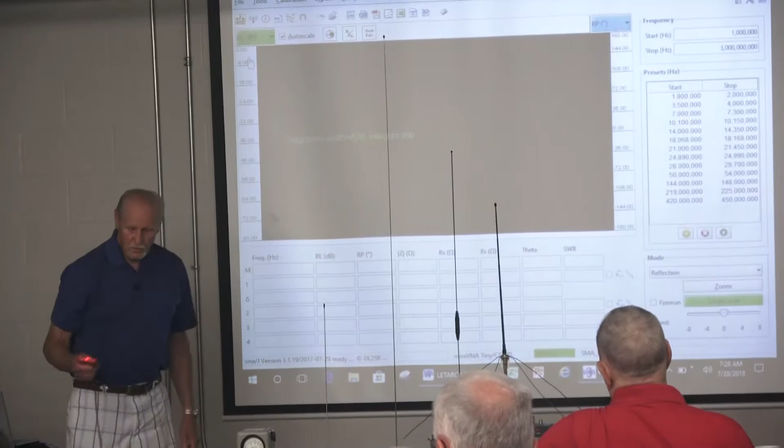So this is what the opening screen of this VNA looks like. The club I think has an MFJ, don't they? Yeah. Now, the MFJ will do a lot of things that the VNA will do, but the VNA will sweep the whole frequency, where the MFJ, you can tune it to a certain frequency, but you can't tell what a lot of the things look like.

I'm going to attach this to the antenna here. Whoop. Adapter. Now what I've done, VNAs are extremely accurate. You can usually tell the accuracy of a meter or any device by the number of decimals it looks at.

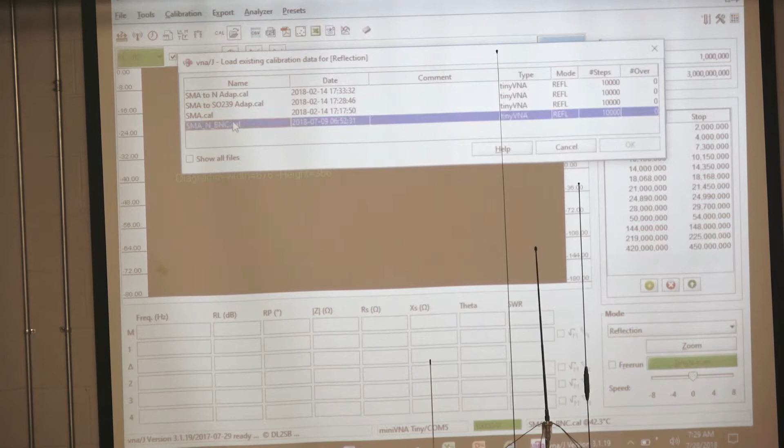Now what I've done with this particular setup, I've calibrated this to where I can come up here to calibration. And I've created files. I've already calibrated for SMA to N, SMA to SO-239, and if I'm just using SMA, or if I'm using a BNC. So I'm going to come down here and select BNC. I'm going to say OK. Actually, it was already down here. You can see down here in the bottom, this is the calibration being used.

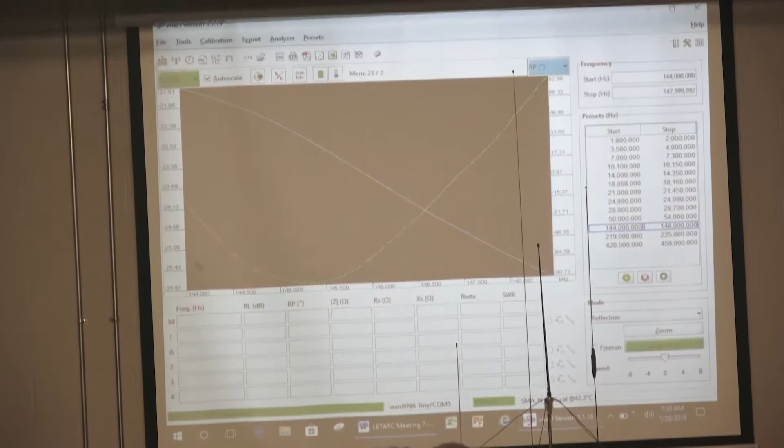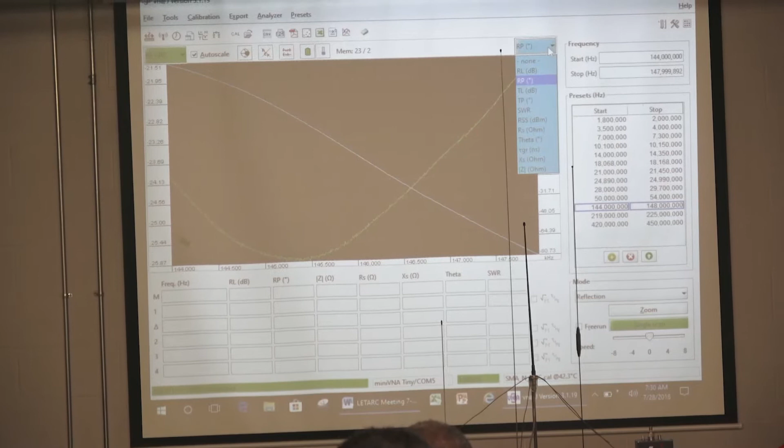I've also selected a frequency span. I've got all the frequencies here that are used in the amateur band. Right now I'm using 144 to 148, the 2 meter band, a 2 meter antenna, and I'm going to click on that and insert that frequency up there. And what it did, it swept this antenna. Right now I'm able to look at two different things, return loss and phase, and I'm going to say SWR. Now, which antenna? This antenna right here. This is the antenna I'm attached to right here.

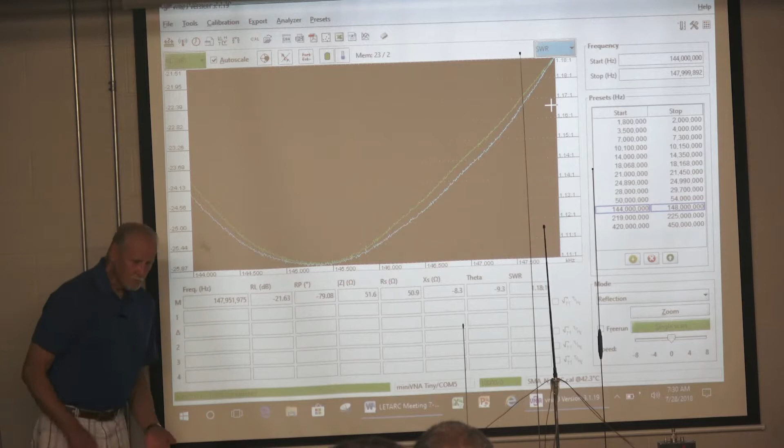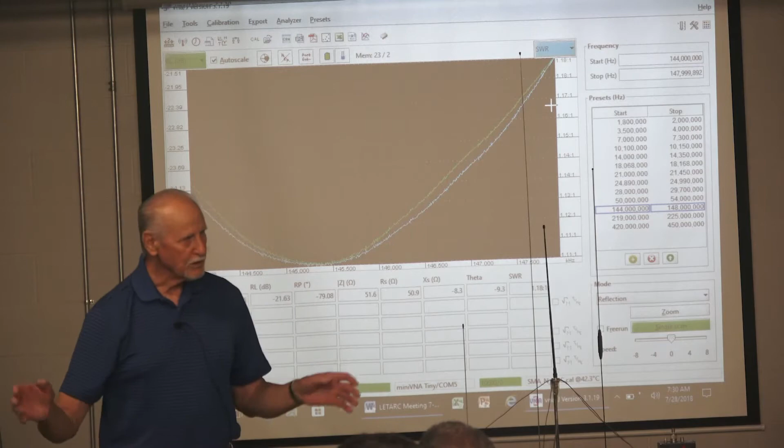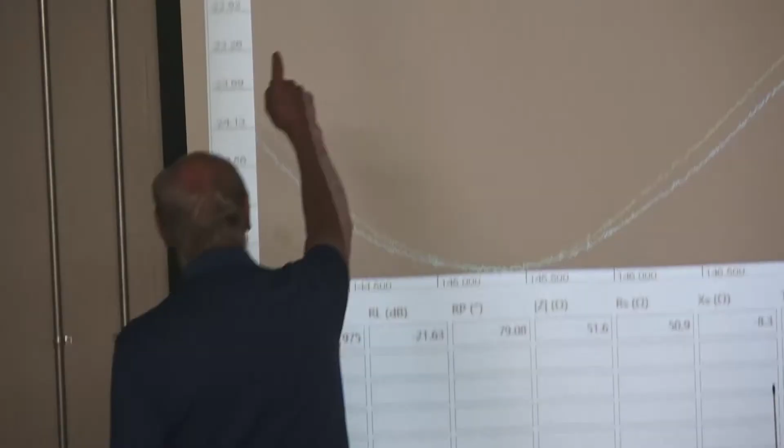Now, in the engineering field, I had a lab that had thousands of dollars worth of equipment in it, but I did not have an SWR meter. I had return loss. Right now I'm looking at, you can see the return loss and the SWR. The green one is return loss, and the SWR is what you use in amateur radio.

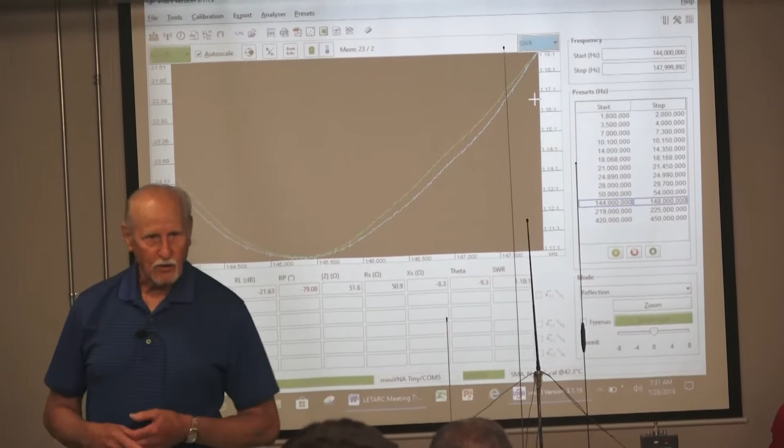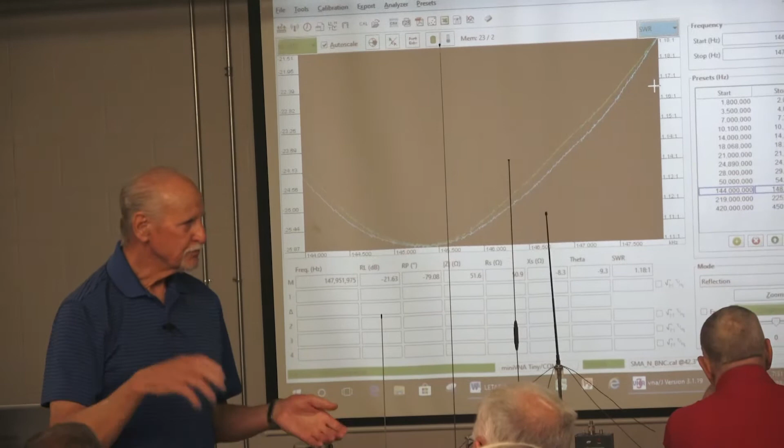What's SWR? Standing wave ratio. Voltage standing wave ratio, right? In other words, your SWR meter has a diode in it, and it picks up a voltage, and it compares that forward voltage to a reflected voltage. Return loss is about the same thing, except you're measuring power. It looks at the forward power and the reflected power. So they're kind of both the same.

All right, we're back to where we were. Notice that I'm strictly looking at SWR. Since we use SWR, I'm going to make this return loss an SWR too, or I can tell it none either way. You can see down here, anytime I move my cursor across here, that right here is the SWR reading. And as I move it across, this antenna is 1.15 to 1 or 1.2 right there, and it doesn't change very much. It's excellent.

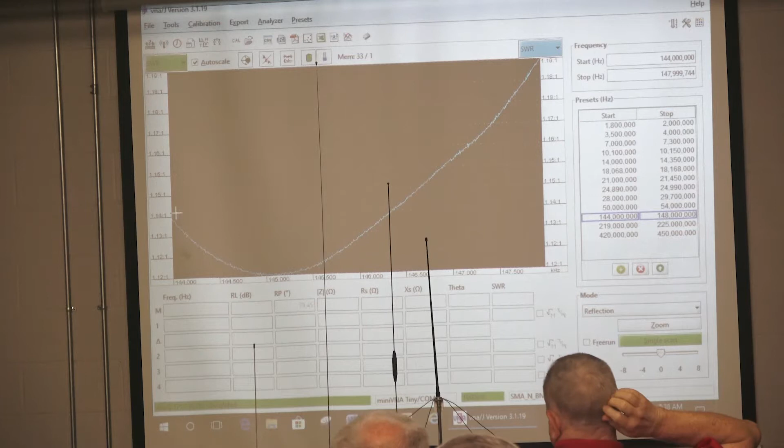Now I can put markers on here. I can come over here and put a marker here. And so now it'll show up below. Marker 1 is at 145.0. You can see how accurate the frequency is on a VNA. And over to the right, you can see at that frequency, the SWR is what? 1.12.

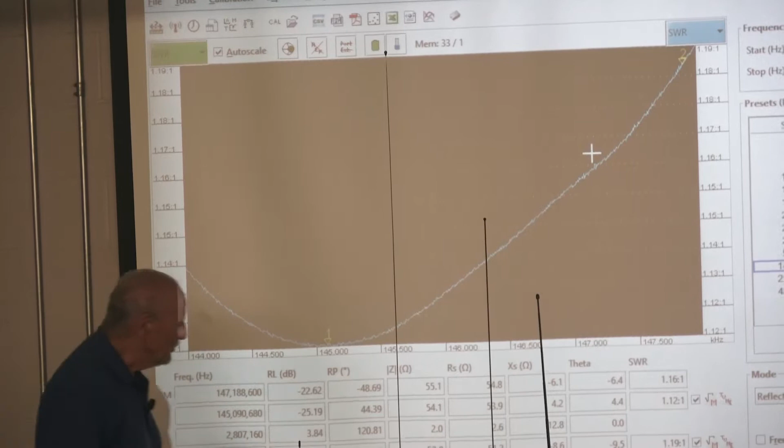So I'm able to look at the complete response, or the worst case over here at the high end of the band. I'm going to put a marker there. At that end, the worst case is only 1.19. So this antenna is extremely good.

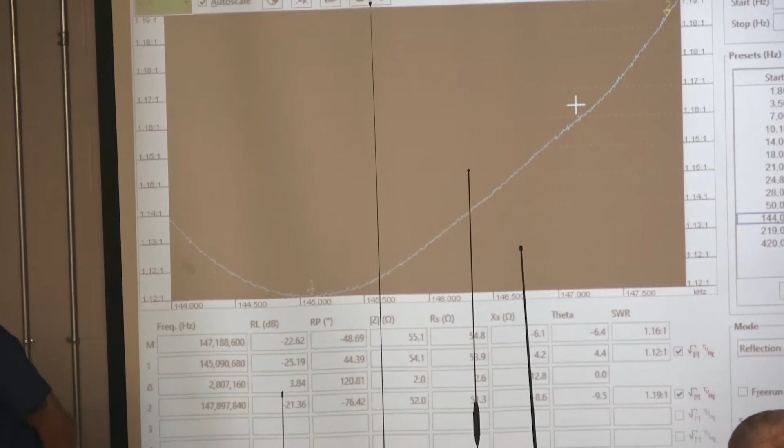When you're looking at antennas, one of the things they might talk about is the resonant frequency of the antenna. What's the resonant frequency of an antenna? How do you determine that? By looking at your graph up there. What really makes things confusing in electronics is resonant frequency occurs when there's no reactance involved. In other words, there's no capacitive reactance, there's no inductive reactance. And reactance is signified by X.

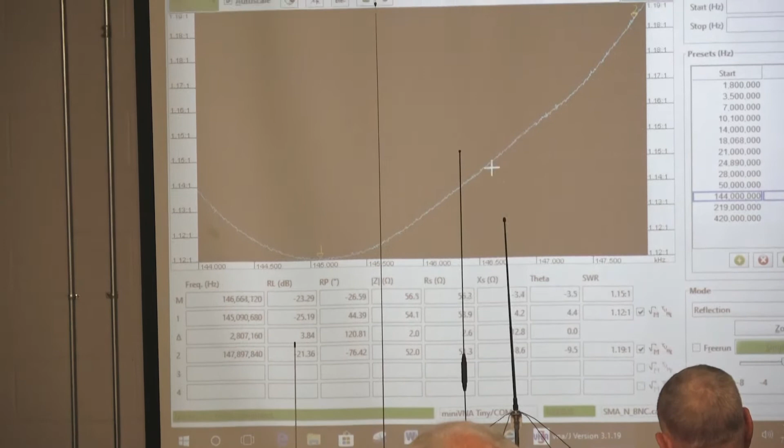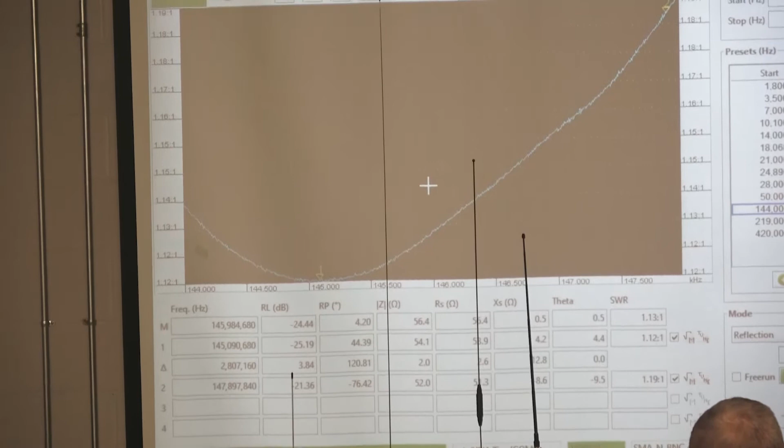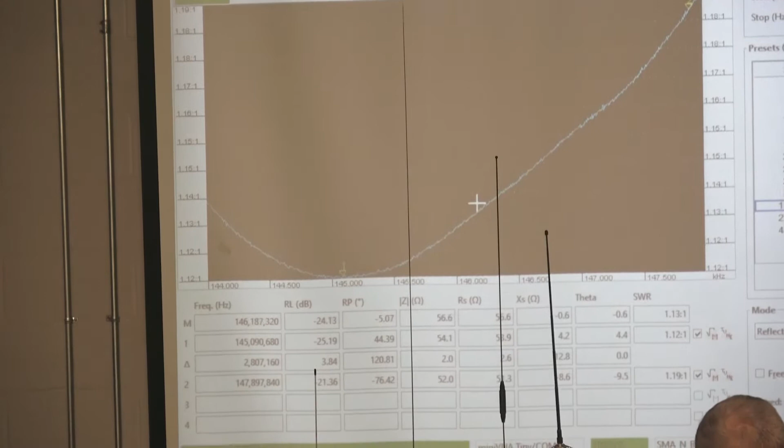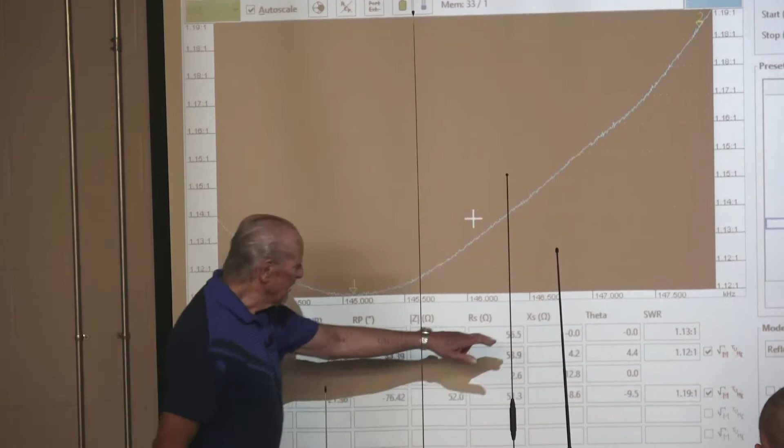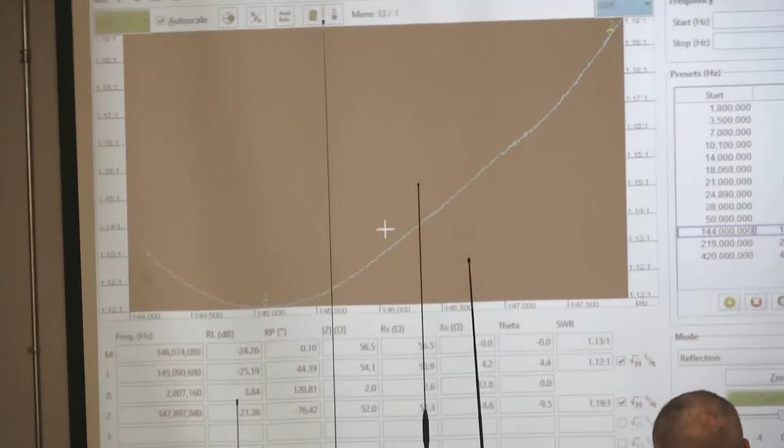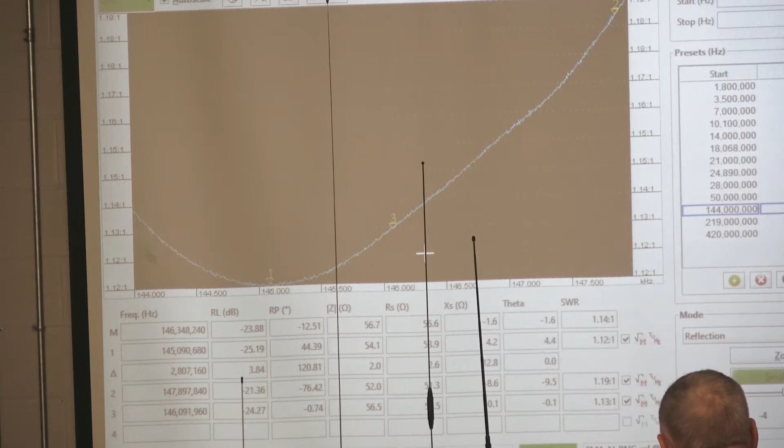Now, VNAs also provide a Smith chart. Let me put another marker here. Now I got 3 markers up there. I'm going to go over and look at the Smith chart. If you were to test this at your home, would you hook it directly to the antenna, or would you connect it after it runs through your cable run into your house? You want to connect it where it's going to connect to your radio, because I'm interested in what the radio sees.

Now, with the SWR on a radio, usually it's just a diode to observe what the voltage is doing. Does that mean that if it's not within the SWR window, it would power down the transmitter? If you didn't have an antenna tuner, most radios will protect themselves by reducing output power. So you think you're doing good, but because of high SWR, your radio is powering down? I can make the radio put out its maximum power by making the radio think it sees 50 ohms.

What you just showed us means the resonant frequency isn't necessarily where the lowest SWR is, right? Not necessarily, no. This antenna showed the resonant frequency and the lowest SWR did not occur at the same place. So is it typical that resonance does not occur simultaneously with the lowest SWR? As a general rule, it can occur at the lowest SWR, but not always. They're usually fairly close. I have a little program on the computer that'll explain what a Smith chart is.

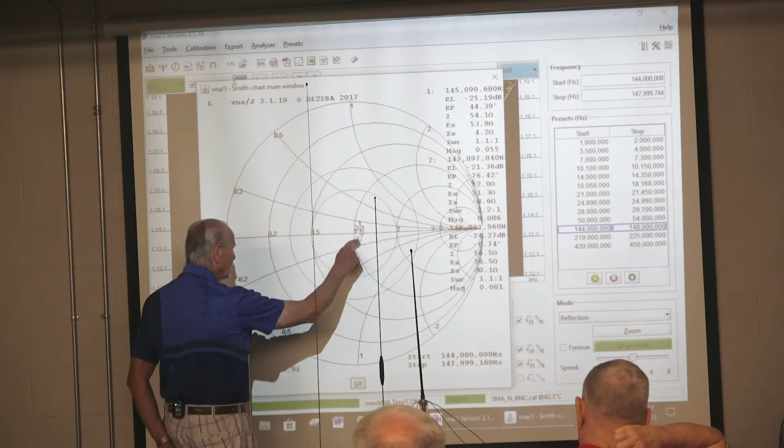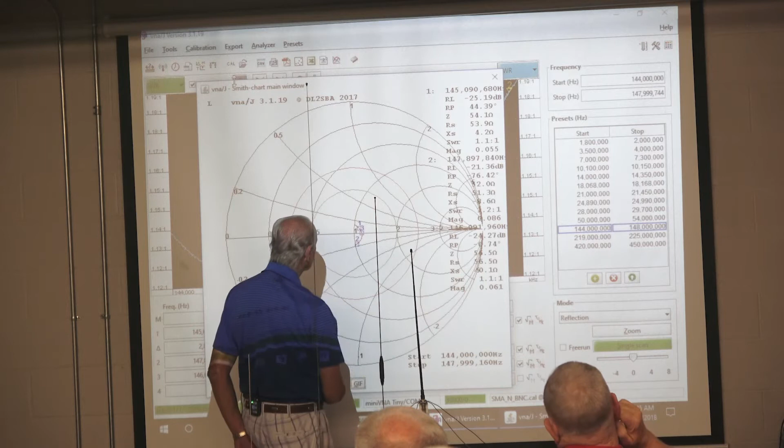I've put 2 markers here. Everything above this horizontal line is inductive reactance. Everything below the horizontal line is capacitive reactance. I've got marker number 3, which was at the resonant frequency. Did I mark 3 at the resonant frequency? Yes.

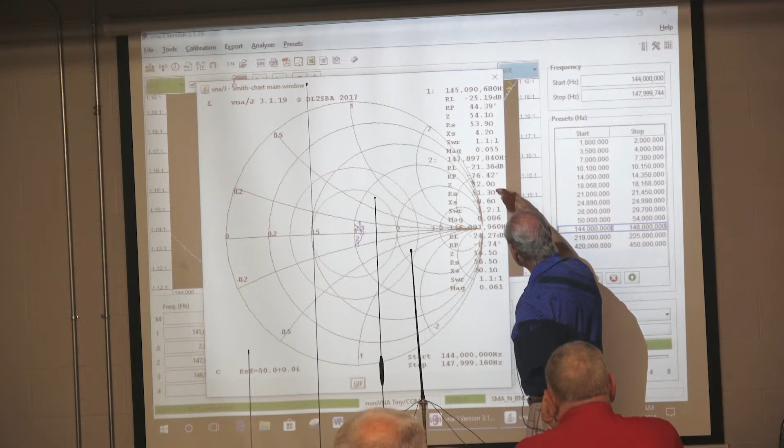You can look at this, and notice that the reactance here is 0. Up here, the reactance is 4 ohms. Down here, the reactance is 8.6. It looks like, I can't really tell what's in the way. I can look at the computer and get a better picture. But 3 is marked the resonant frequency.

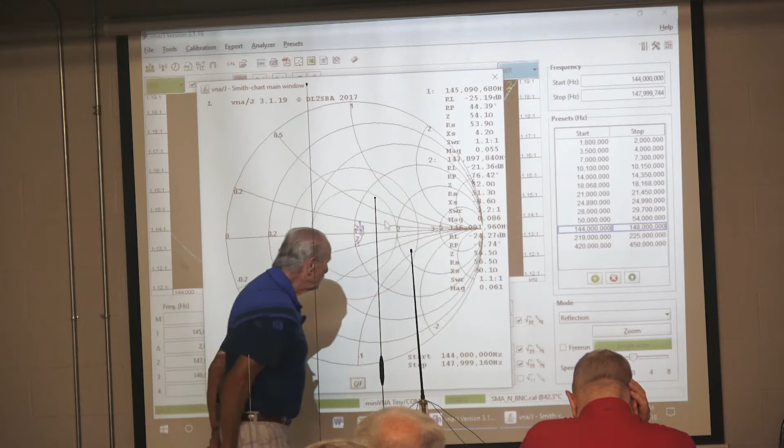There's another thing that occurs when you're at the resonant frequency. That means their ohms is going to be the same. Let me go back to the chart, it'll be easier for you to see. The 3 marker is at the resonant frequency, and we can see there that it did not occur at the lowest SWR level. If I go down there and look at 3, the impedance Z and the R are both the same. Notice the resistance is the same in both places.

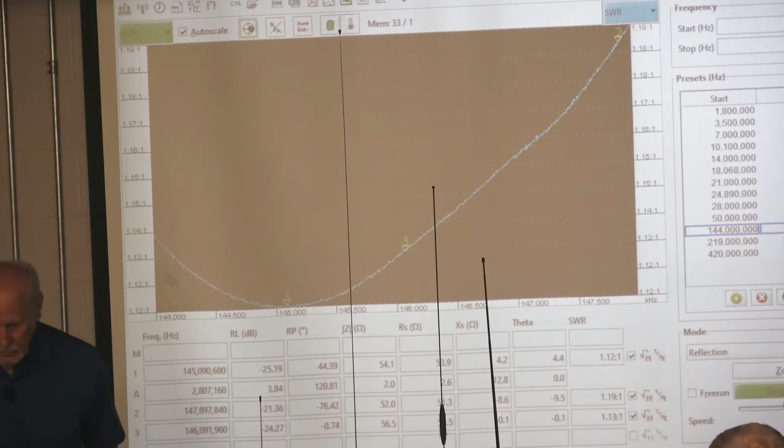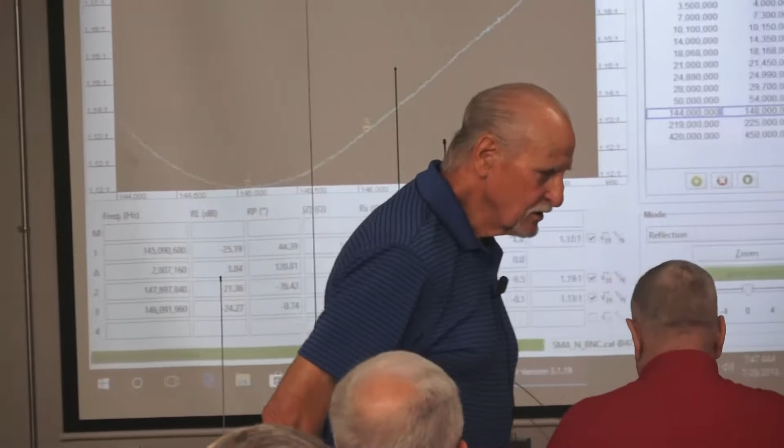If you're going to use this meter here to find the resonant frequency of your antenna, you have to go to X and adjust it until that X reads 0. So this meter right here will tell you what the resonant frequency of your antenna is. You just have to keep adjusting it until you find the 0. This has 2 meters. This is the imaginary resistance meter. This one up here is the true resistance. So this resistance and this resistance are going to read different.

Does everybody know that? Could you expand on that a little bit more about what the difference is or why it reads different? I'm not really following the concept of imaginary resistance. They use resistance as a measure of capacitive reactance. Right, but it's not really a true resistance, it's an imaginary resistance. Well, true resistance is an element that actually dissipates power, okay? Capacitive and inductive reactance are not a measure of power. They're a measure of the energy that's stored either across the plates of a capacitor or in the coils of an inductor.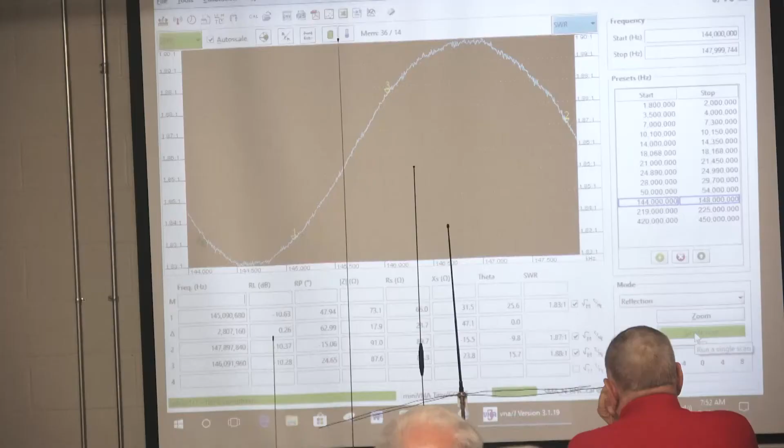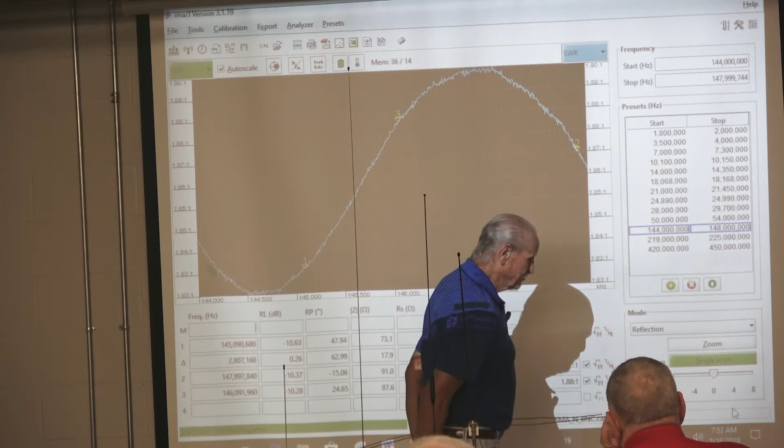I moved the radios on this one here. I'm going to do another sweep. So is the answer, like many things, it depends? Because you're talking accuracy, it depends on your source of accuracy. Doesn't look anything like it did before, does it? You can see up here now, the SWR has moved from low 1.1s to 1.9.

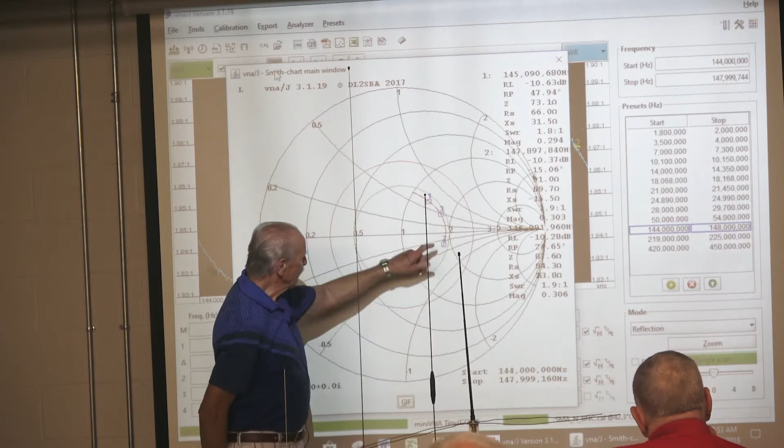Look at what happened on the Smith chart. The antenna has all of a sudden become very, very inductive. And what happened to the resonant frequency? This is the resonant frequency point down there now.

Can you overlay those two charts? Do what? Can you overlay those two charts? Not the Smith charts, but the graphs. You mean the original and this one? Oh, no, I can't do that. I could if I was doing it on the computer.

I brought 3 different antennas here. Quarter wave, 5/8, and a dual band antenna. We get kind of fixed on resonant frequency. One of those antennas does not resonate at the amateur band. Which one would that be? No. The 5/8. The 5/8 is a non-resonant antenna.

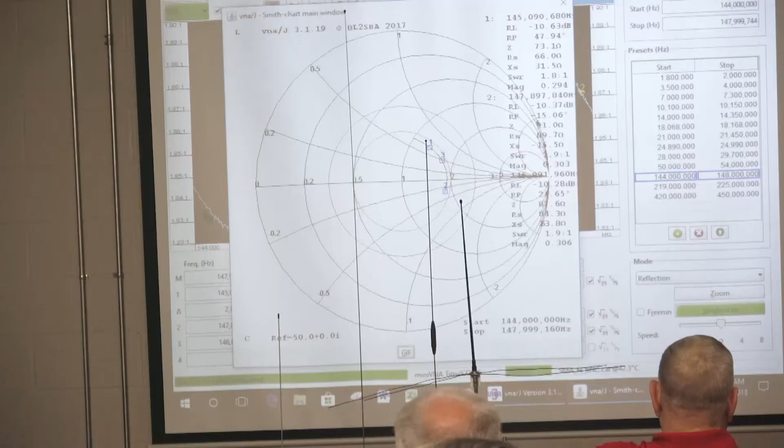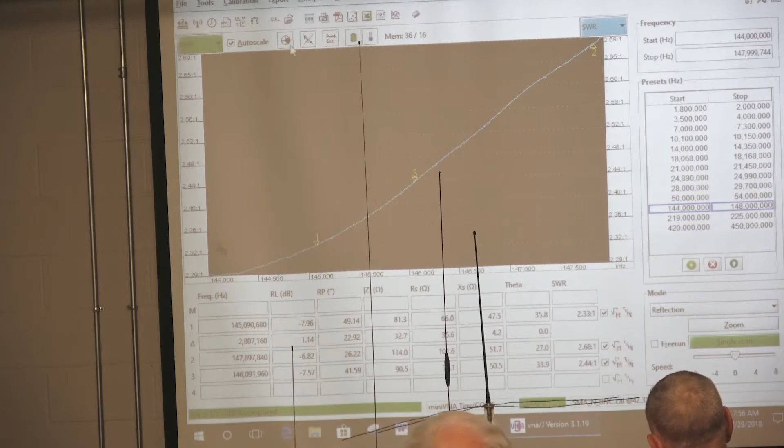If I hook that antenna up to this VNA, do another sweep. If I run my cursor across here and I watch X, I can see that no place does X ever equal 0. Look at my Smith chart. This is the resonant frequency line here. This never crosses that line anyplace.

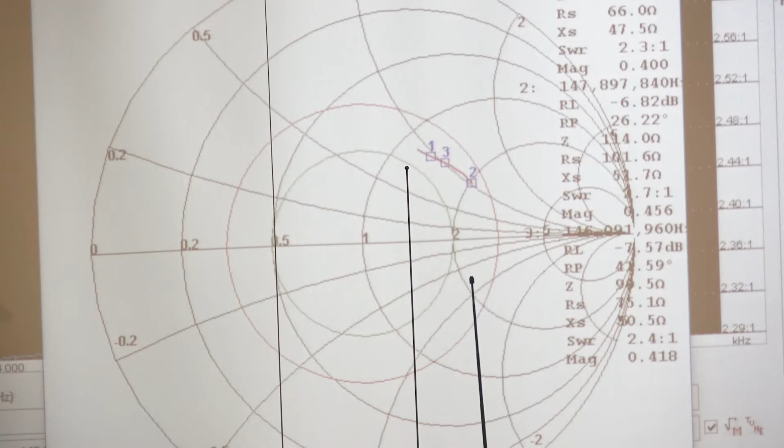But 5/8 antennas are used on a lot of vehicles, a lot of commercial vehicles. If you look at a police car, it'll usually have a Larsen 5/8. What about the SWR? Worst case SWR is what?

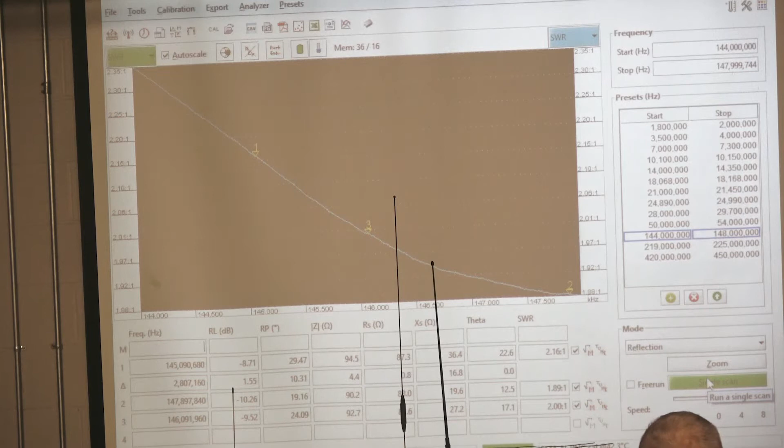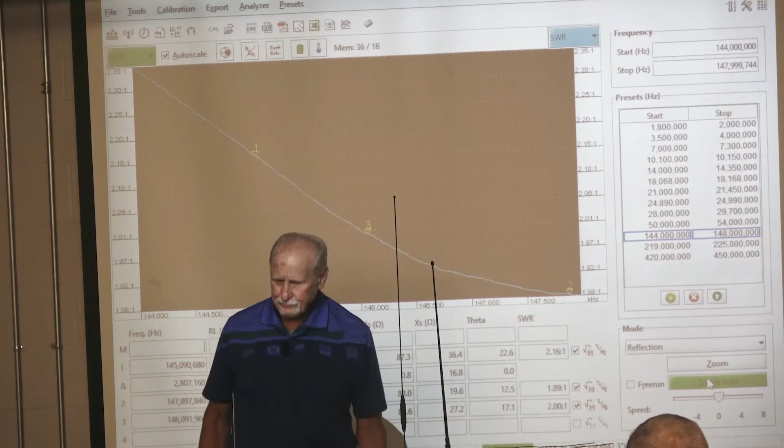Let me move it away from the other antennas and see what it looks like. It's not resonant, why do they use that then? Is it just propagation? It's fairly low. Okay. Oh, it swapped ends, didn't it? But even at the best end, I'm still what? 1.8. So was that an effect of the other antennas that you have here? Probably not. It doesn't have a ground plane.

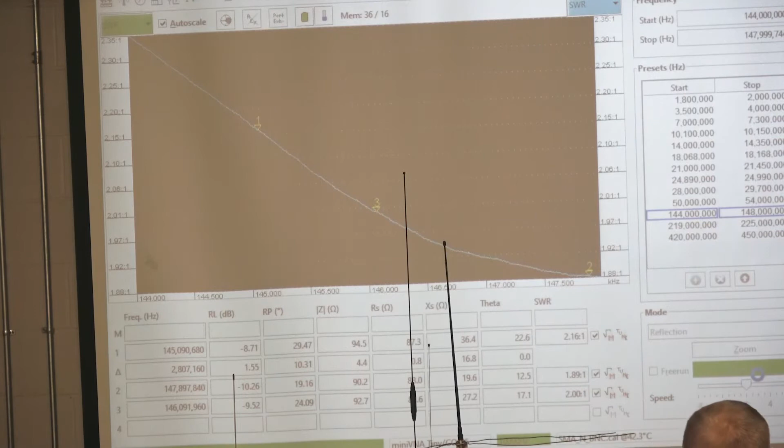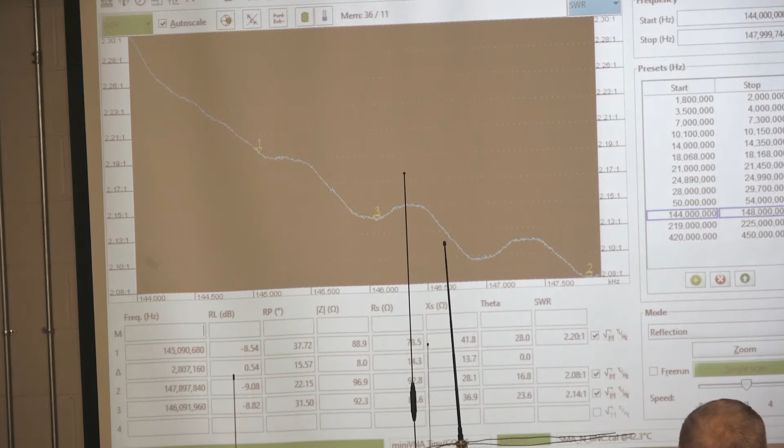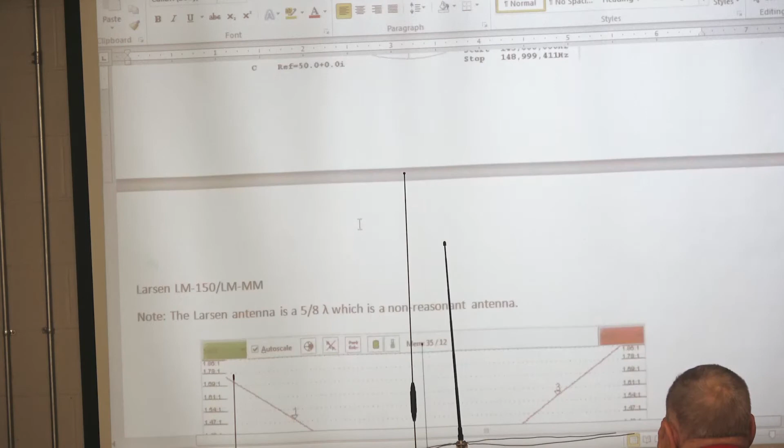Let me see what moving it to there did. All right, this is the performance of this same antenna on top of my car. Your car obviously has quite a bit of metal in it. Not like most of them nowadays. Yes, it does. It actually has a ground plane. What's gonna happen when it's covered? You won't see that dip.

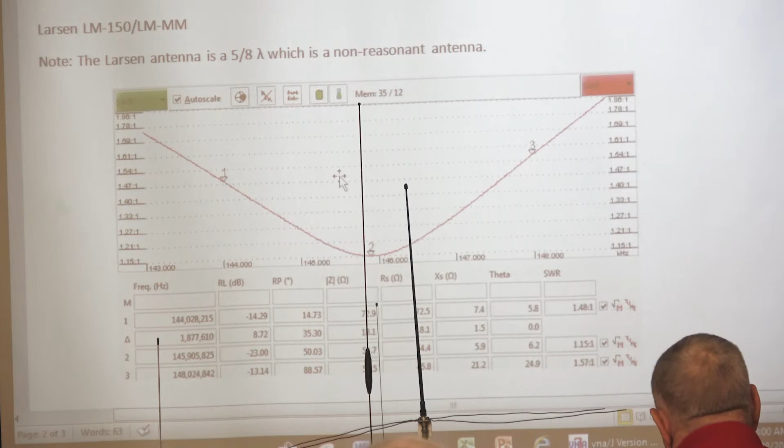You can see that the SWR is a lot better. It's still not as good as a quarter wave antenna with a good ground plane. Believe it or not, that 5/8 never is attached to the ground any place. In other words, your shield on your coax, this is a coil, and you can notice the coil is all plastic, and there's nothing connected but the center.

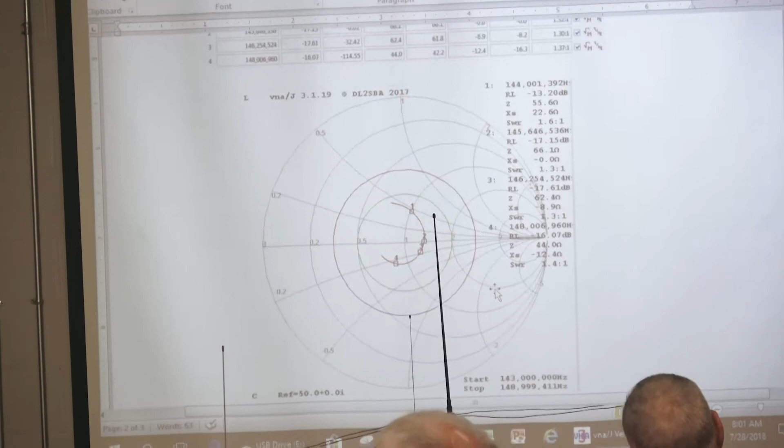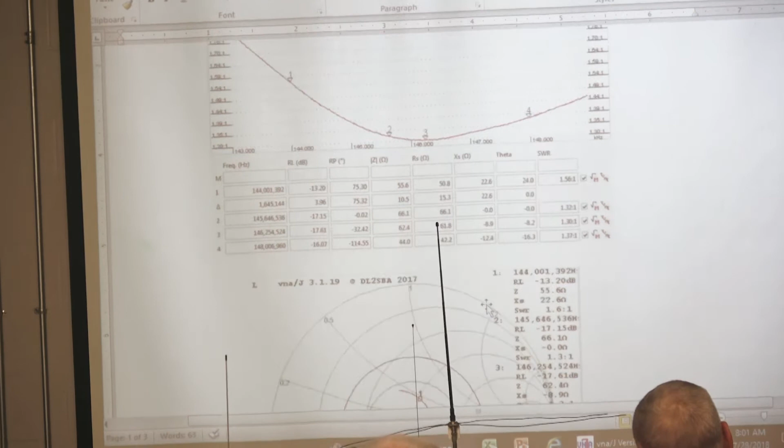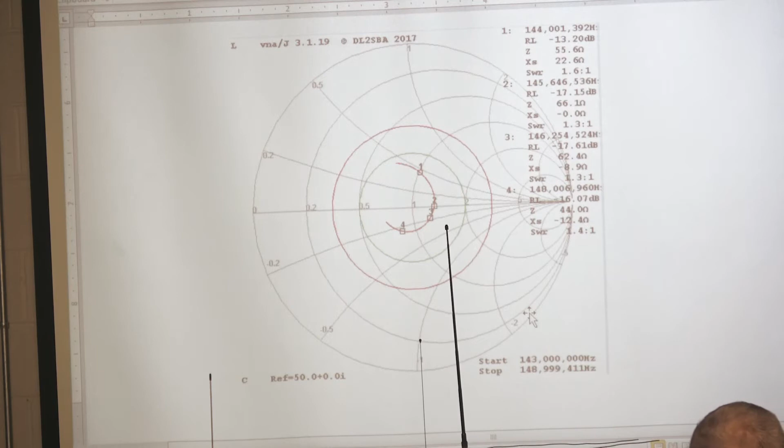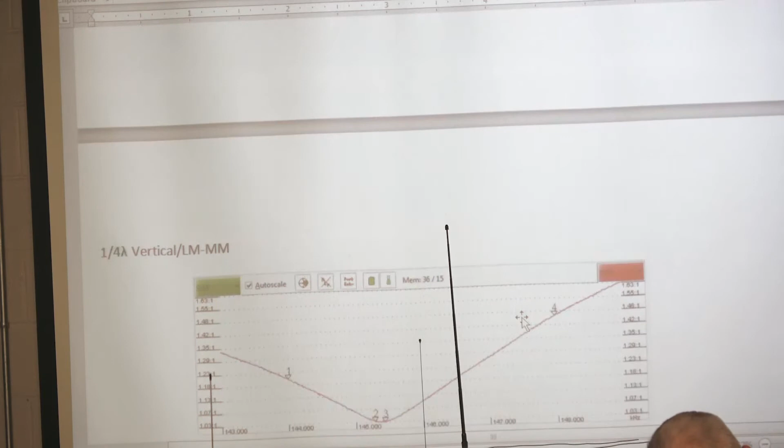And the quarter wave antenna, this is a quarter wave antenna on top of my car roof. And you see it also has what? A resonant frequency. It crosses that horizontal line. Of course, my rooftop does not bend like this. So the SWR is actually pretty good though, isn't it? 1.4 at the worst case. Both ends 1.2, that's not bad.

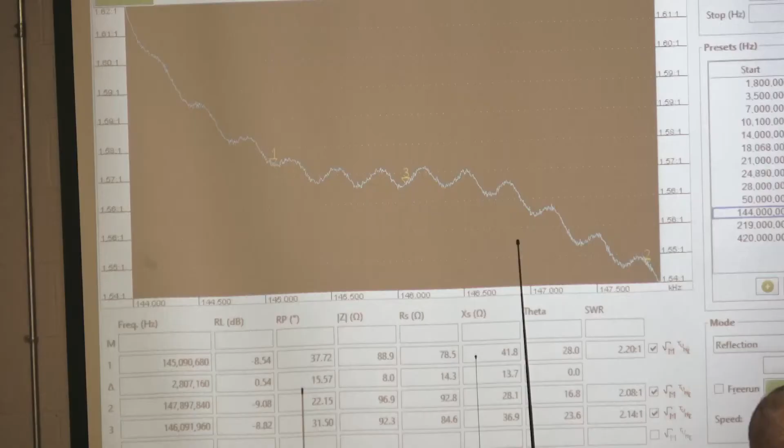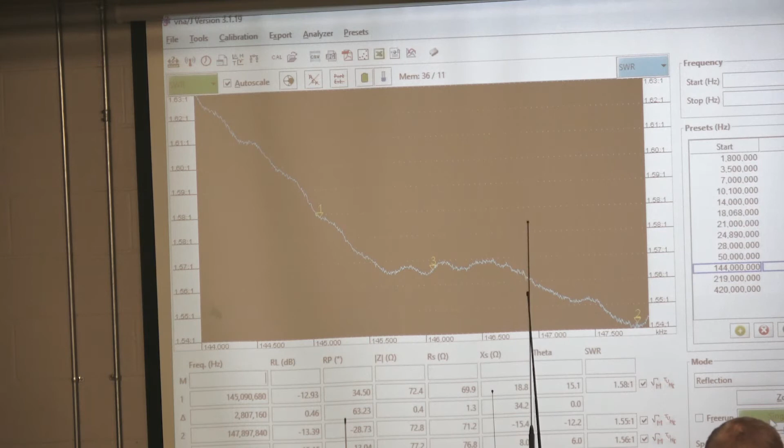Roof of my car. What you're seeing is the ground plane is wiggling a little bit, so you're seeing all those ripples. Why is it rippling? It's moving. Because the ground plane is part of the antenna. You can see the longer it sits there, the cleaner this will be.

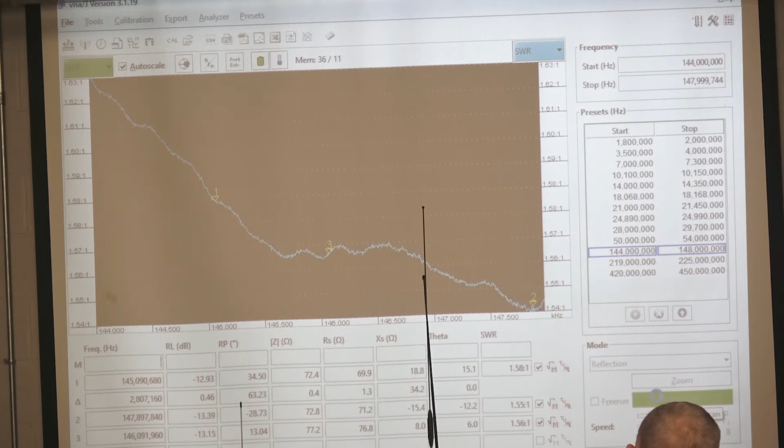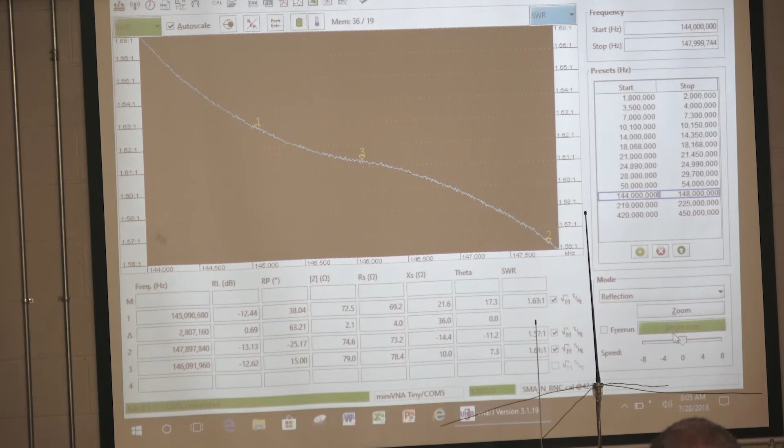When you're adjusting your antenna on your car, where do you need to do that? Not next to your garage or someplace. You're real close to the dual band antenna. Yeah, leave that one down right now.

It's a wonder we ever get out of the car with our transmissions.

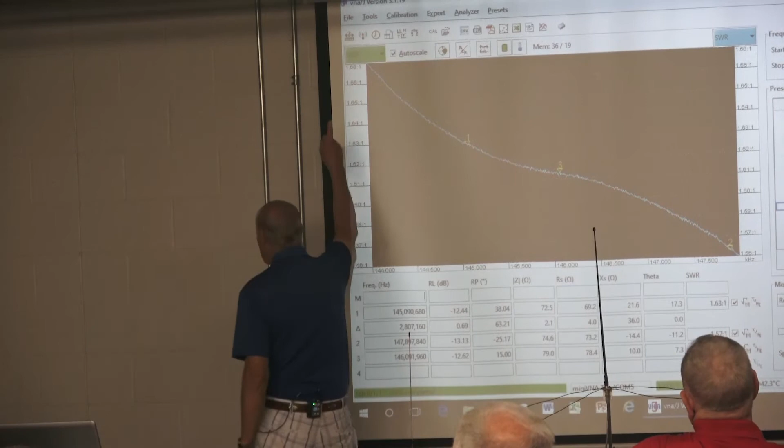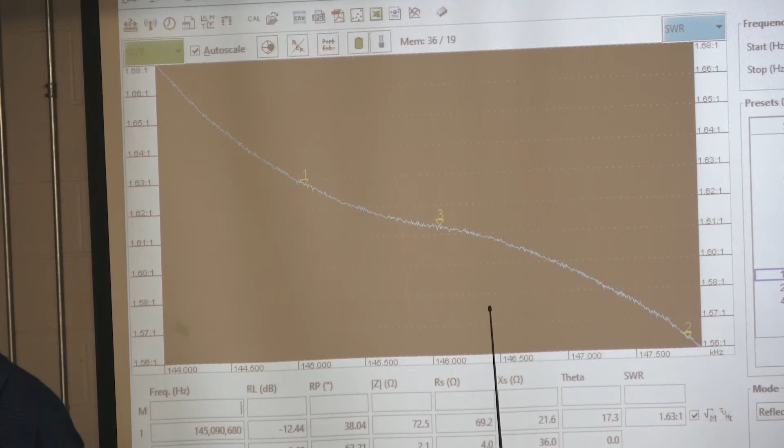I can see the worst case now with that flat like it is, what? What's the worst case? I'm gonna add my SWR meter here to this scenario.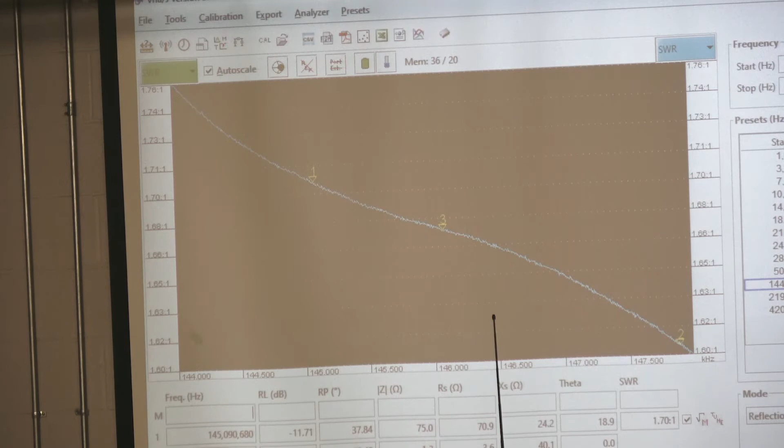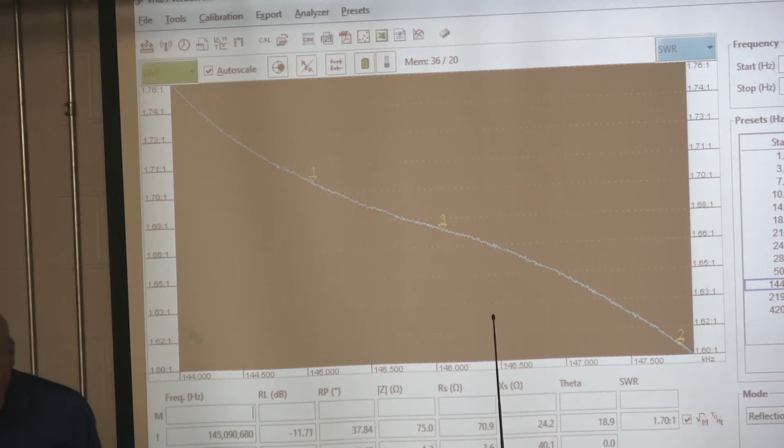So that's the frequency range of TV and amateur radio. Sure, right. So what I'm trying to do is see what it is approximately. Oh, okay. Changed the one end quite a bit. Actually, it made it better. What I wanted to illustrate there is when you put a meter in line with your antenna and you take it out, you've changed the length of the antenna line, and you can see that the antenna length is changing its resonant frequency. Actually, let's look at the Smith chart, see what it does to it.

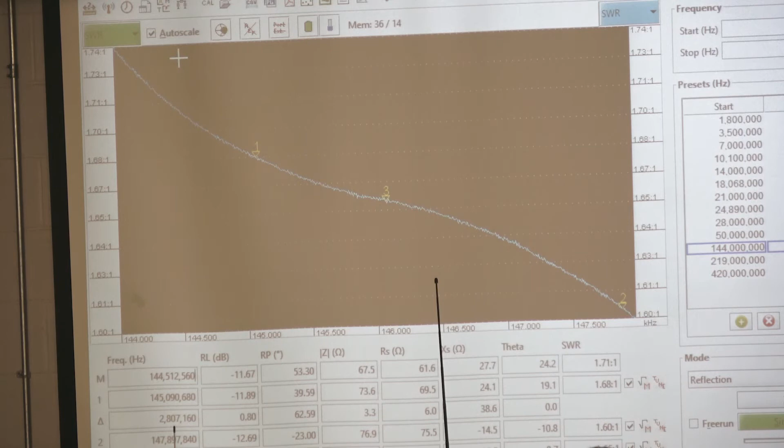Jerry, if you just substituted 20 feet of coax in there, would it? Oh, it'd do the same thing. Anytime you change, that's why I say when you go to adjust your antenna, you need to use something that's measuring it at the, when I take it off the instrument and I'm measuring the width and I put it on the radio, I want the radio to see the same thing I measured. That's why you gotta measure right in front of the radio, not at the actual antenna. Pardon? That's why it's important to measure directly at the radio, not at the antenna. Because everything else is gonna affect the reading.

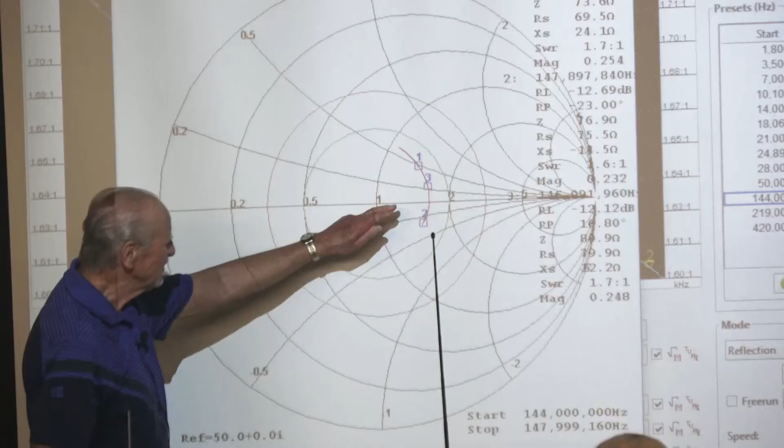I'm not sure, but antenna height is also going to affect it, up on the tower or close to the ground. I want to measure it right at the antenna. Okay, but I'm going to measure it right at what hooks to my radio. Okay, but if I'm trying to tune the antenna, shorten or lengthen the elements, is it doing good to measure it close to the ground, or has it got to be up on the tower? Or is it going to change significantly with antenna height? It's going to change with antenna height too. Up and down, up and down. This is the case where there's one on the truck, there's the tower, leans over, so you can work on everything. By changing my ground plane, I've also changed the resonant frequency. If I add cable to it, if I change the meter, I'm going to add the meter to it.

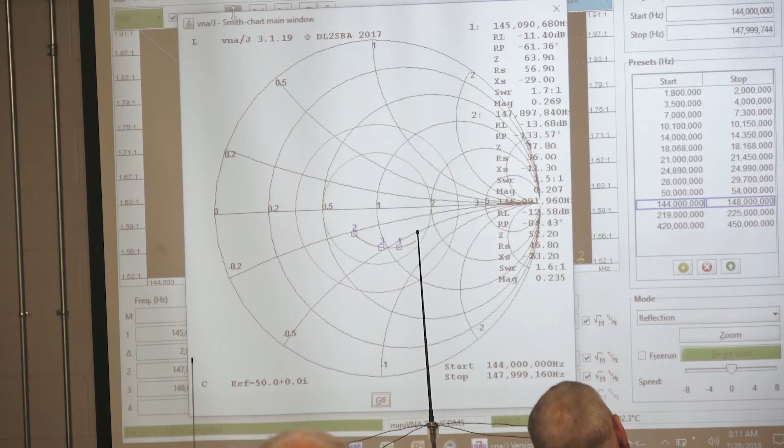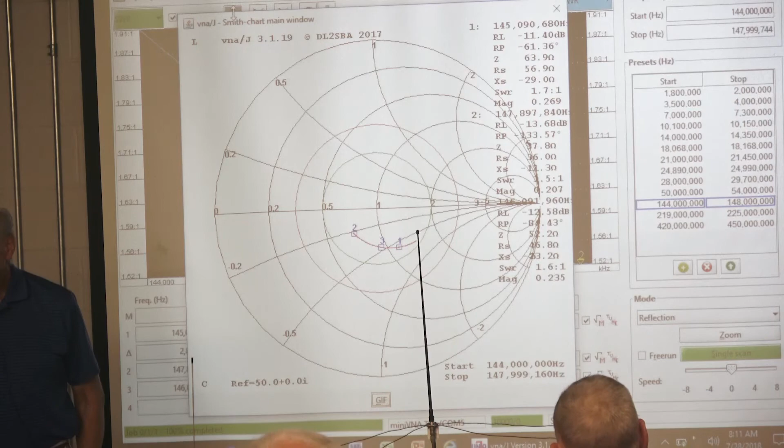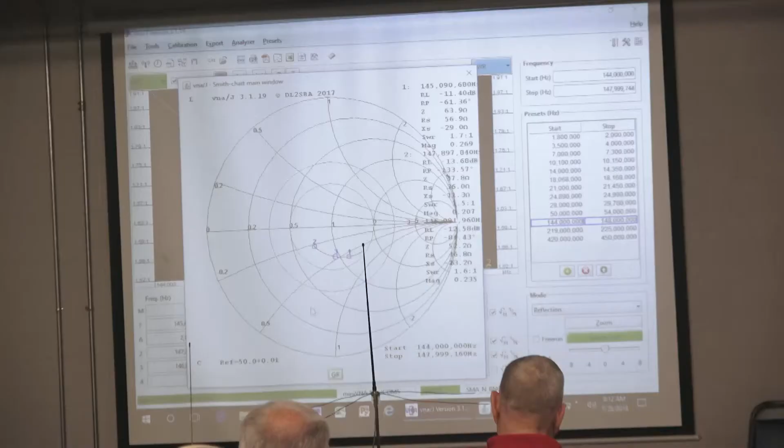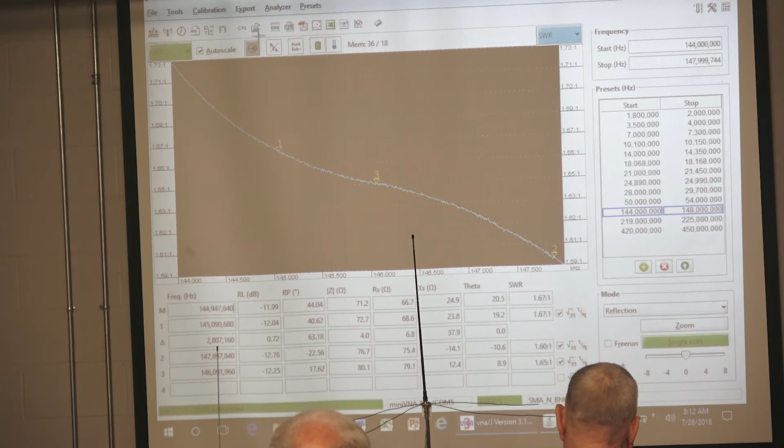Look at what happened to that antenna. Huh? It's all capacitance now. Everything's below. There's nothing anywhere near the resonant frequency. Just by adding what? From the amount of movement, about a quarter wavelength. Huh? The SWR really didn't show me a whole lot of difference, did it? Go back to the Smith chart again. That's without the meter.

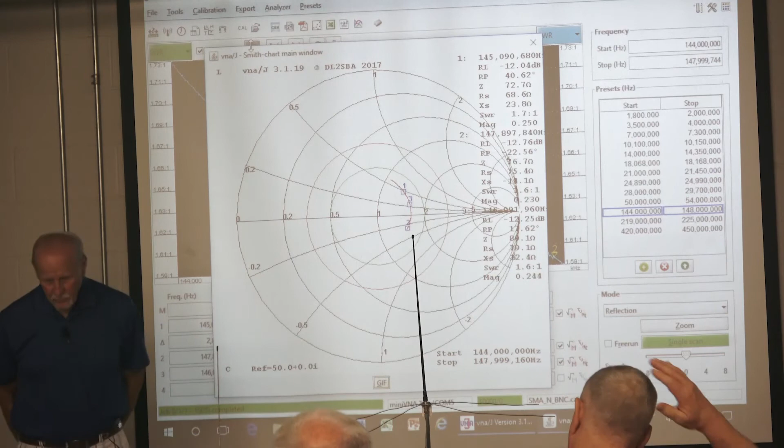So what that's telling you is if you use an SWR meter and you put it in line with your antenna line, it's not going to be the same when you take that meter out and hook it up to your radio. It will not. Will the reading on the SWR be accurate? It won't be what the radio sees, because you have the radio back here and your meter and your antenna, but between here and the antenna will be accurate. But I'm interested in what the radio sees. Right, but I just want to understand that part. Right.

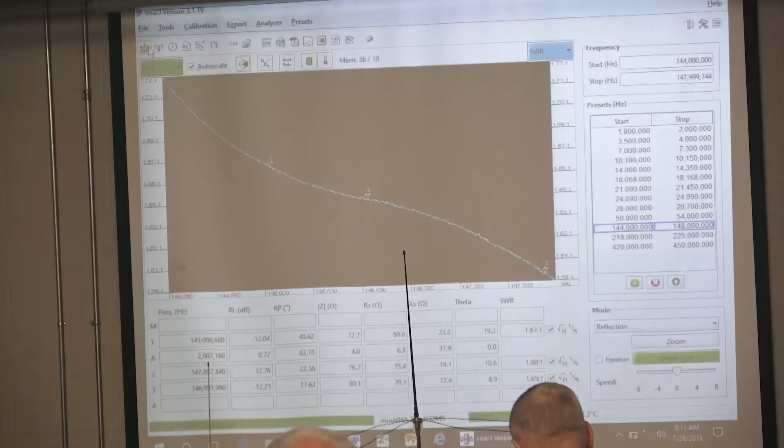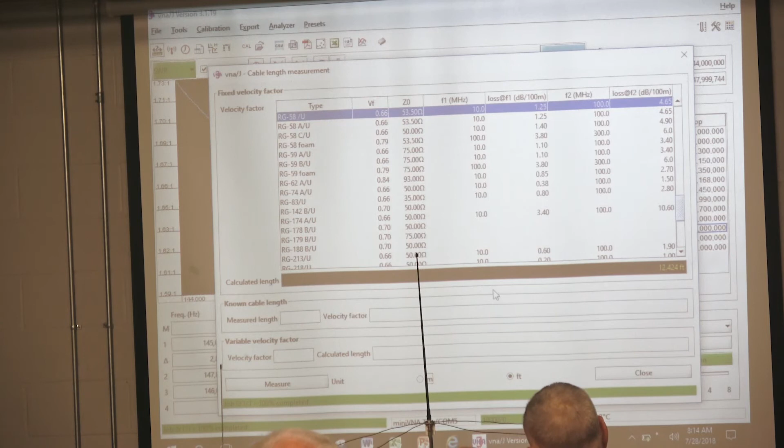If I'm in my shack and I hook it to my antenna, and I say, I want to know how long my feed line is. I'm gonna go over here and change that to feet. I'm going to say measure. All right. That tells me that the length of this cable right here is 12.4 feet. Pretty neat, huh? We went out and measured the length of that cable.

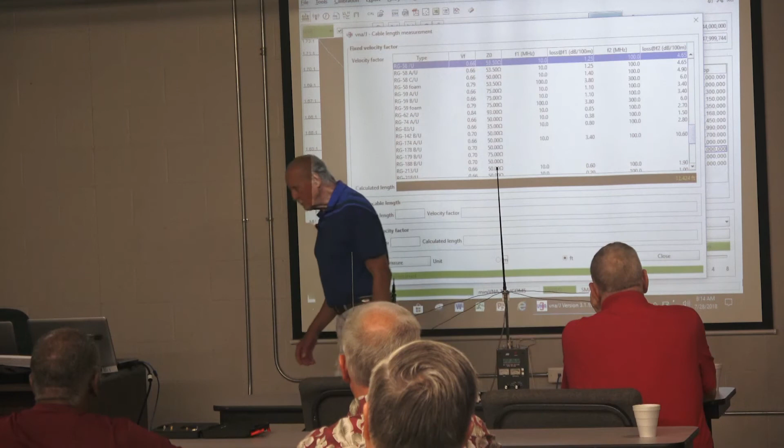So, Terry, I have a question to ask you, but I don't want to take us off in a different direction. I'm going to go ahead and ask you. If we go out to the antenna, we climb up our tower and we hook right on to the feed, and we take our MFJ and we find the exact resonance for that antenna. That's important because that's what radiates, having the length be proper. If we go back down to the radio though and measure it, the SWR could be bad, but the radiator's still good. You're talking about radiation efficiency. Yes. Which is something that should be important to us.

Radiation efficiency and resonance don't necessarily mean the same thing. This antenna right here actually radiates quite well, even though it's not resonant. The advantage of this antenna is its radiation pattern. 5/8 antennas have a lower radiation angle.